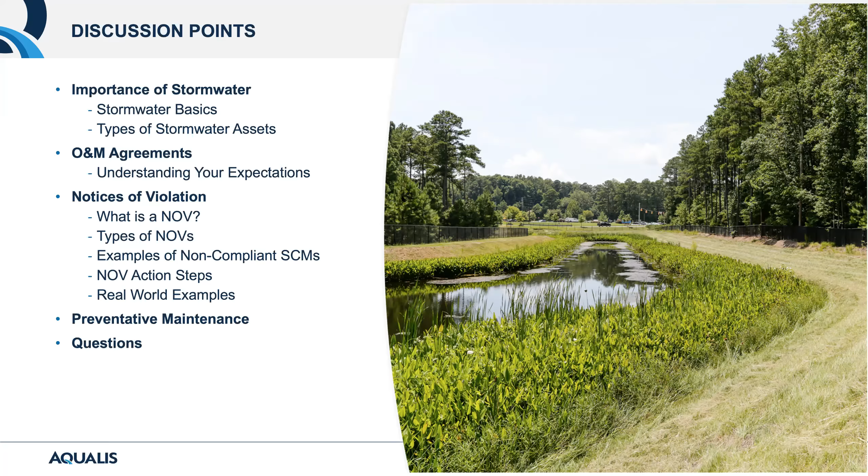Basic understandings and things. So without further ado, we'll get kicked off on some of the stormwater basics. Just a quirky drawing about the basics of stormwater, and we thought this was prevalent because obviously you've got runoff from buildings, you've got runoff from parking lots, and all of these things have potential harmful pollutants that can run into the storm system, whether it be gasoline, trash, or sediment. This is a constant battle with the stormwater system.

And I like this slide in particular because I think a lot of people, including myself before I got into the stormwater world, kind of forget about the stormwater once it hits that drain and starts going down to where we can't see it anymore. I think the public tends to forget about it unless things are flooded. And what I learned real quickly in the stormwater world is where that water eventually flows and how it gets there is just as important.

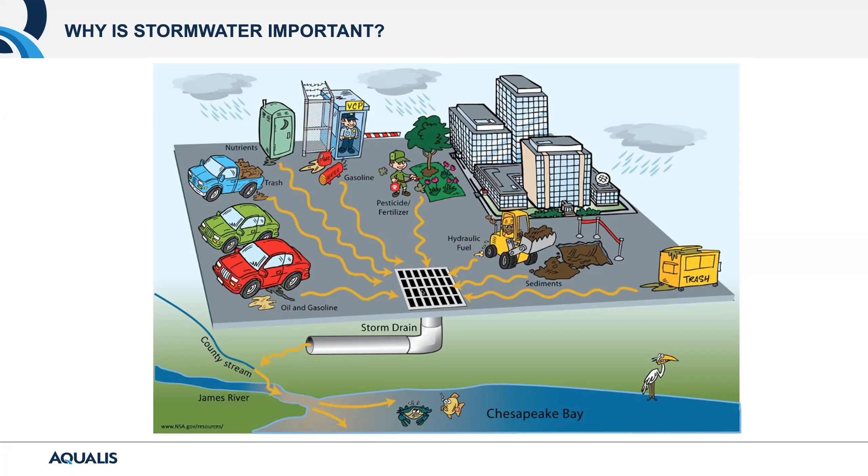As you can see in this slide, the storm drains discharge into the county stream, into a river, and into a major watershed at the Chesapeake Bay. And again, these are areas where people recreate, get food, swim, and fish. So it's very important that we make sure we do what we can as stewards of the land, stewards of our property, to make sure the water we're flushing down the system, for lack of a better term, is of high quality and managed the way it's supposed to be and how we've agreed to.

Continuing on, that diagram also was a good one, as well as this one, with stormwater runoff. In the early 70s, the United States basically realized that this runoff and all this development needed to be managed. So they came up with the Clean Water Act in 1972, and it was updated in the year 2000 with Phase 2 of the Clean Water Act. This basically states that any land disturbance or any development of one acre or more is required to comply with and manage their stormwater runoff.

There are some standard minimums to remain in compliance, but it's definitely something that the EPA and the United States government has put great importance on, and it's something we need to be aware of. This isn't something that's made up - this is something we're all relying on, and the government is pushing that compliance down to the local municipalities. So it's very important.

I want to point out, we're going to get into some acronyms and different terms. One on this page, MS4, basically stands for your municipal separate storm sewer system. So we've got the municipal and the four S's of separate storm sewer system. You might run across that in an NOV.

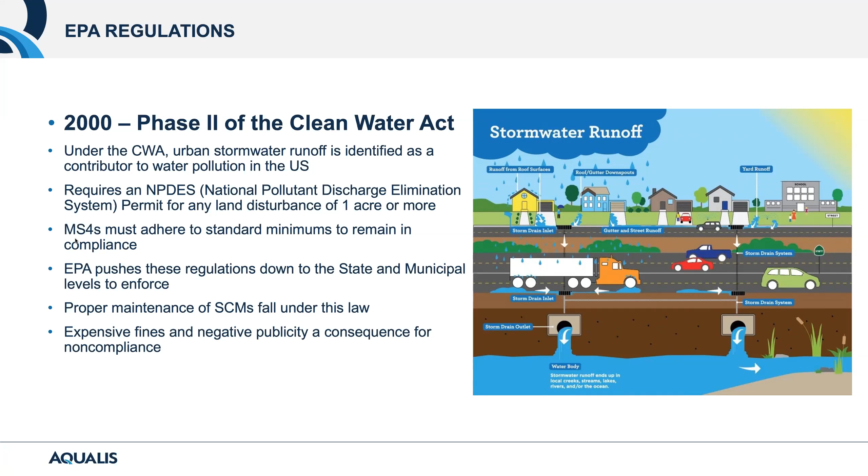It's basically the discharge area maintained by the municipality of where stormwater might run into. But again, it must be designed and adhere to minimum standards to be in compliance.

As we move forward, we're going to get into more acronyms. You will, if you ever receive an NOV, see acronyms like BMP or SCM. Really those acronyms are one and the same.

A BMP always kind of tripped me up. It's a best management practice, and it always tripped me up with the word 'practices' in there, describing some kind of action. But really that means it could be a thing - it could be a catch basin, it can be a pond. So I love the updated language of stormwater control measure.

It gives me a better feeling in my simple mind of what we're talking about and what that asset is to control the stormwater or convey it to wherever it needs to flow downstream. So you're going to see these acronyms a lot in pages and NOV letters. Just know that they're one and the same, and they're referring to the assets on your sites. We'll start to review some of these as we move forward - assets that either collect and convey and also ultimately discharge this rainwater.

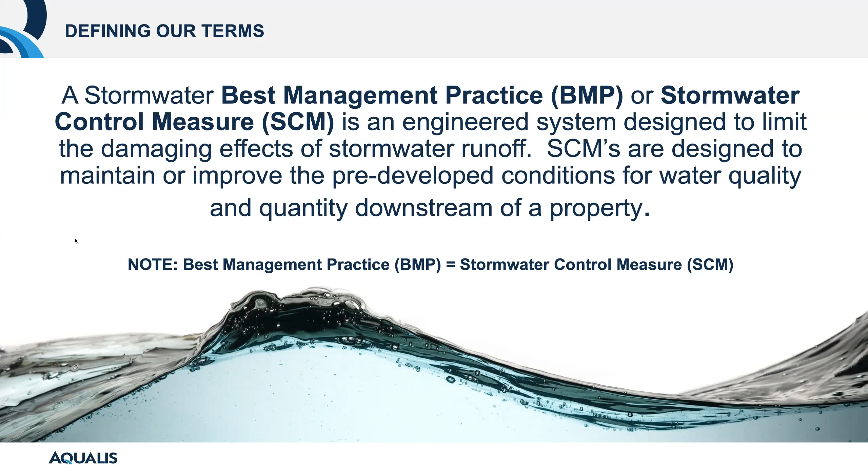There are definitely some SCMs that convey that stormwater to get there, but things like retention ponds - these are the actual ponds most commonly that are retaining water. You'll also hear the word detention pond. Detention ponds are basically the same kind of thing, but are really meant to detain the water for a certain amount of time before it either infiltrates into the ground or gets conveyed out to the MS4. So a good place to start with some of the language.

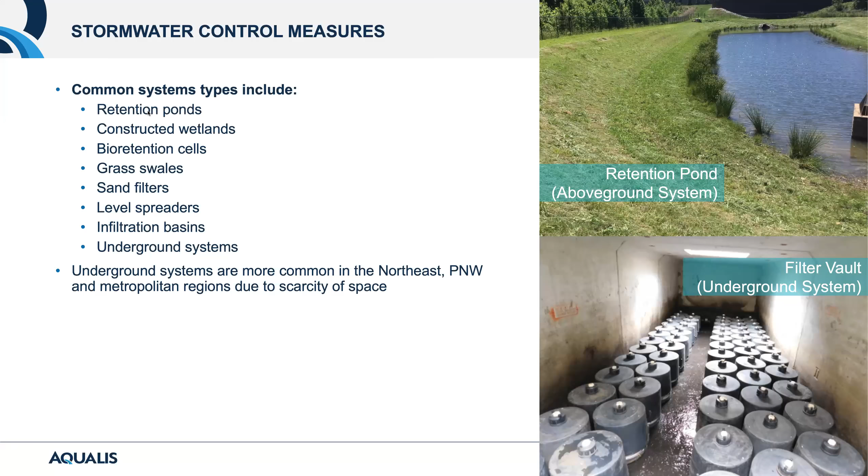Nowadays, with the importance of environmental push and stewardship of the land, you've got things like sand filters, which kind of naturally filter stormwater through a bed of sand. Grass swales convey, and bioretention cells are very popular up here in the northern Midwest, quite a few around the Minneapolis area. We'll get into a bit more of that, but know that these are all SCMs, and these are very common in use on the property or where that stormwater is going to end up.

Now, as we think about these in-use systems and these SCMs where the stormwater is going to eventually reside on your property, we think about two things: water quality and water quantity. Both of these can be an issue regarding stormwater and SCMs, and could trigger a notice of violation.

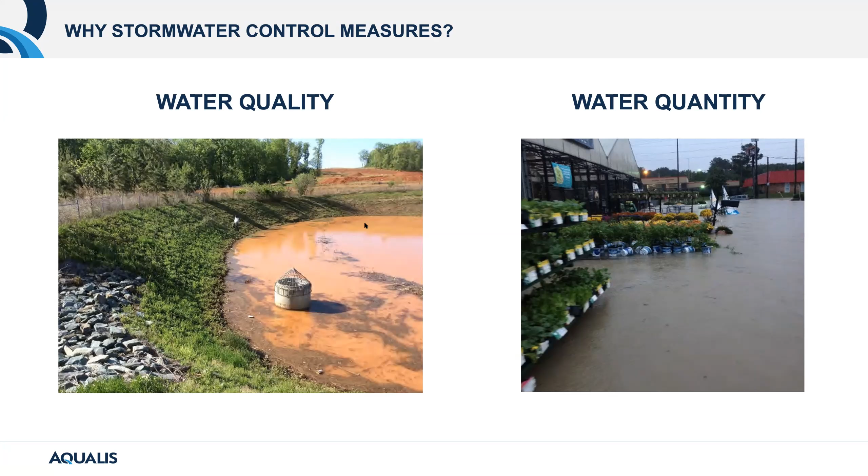And obviously you can see on the left, the water quality example - that water doesn't look very good there in that pond. We'll get into some of the pollutants and things that the Clean Water Act defines on the next page here. So we talk about pollutants and all the things that can affect water quality and a little bit of water quantity as well. But these are all things that are defined by the EPA and the Clean Water Act.

We're going to start with trash and debris.

Trash and debris negatively impacts living organisms and can clog up inlets and outlets. One of the most common places where trash and debris collects, at least in the retail world, is in your ponds, basins, and detention basins. Loading docks are also a very popular place where trash from everyday use collects. Stormwater typically ultimately runs there, so you need to stay on top of it to make sure drains and outlets are free and clear.

Another big thing the EPA points out is nutrients, anything in the water that can promote algae growth. Down in Florida's Everglades watershed, they had a strange red algae growth impacting the oceans, contributed in part by nutrients running off, including fertilizers. Up here in Minnesota, we get alerts during the summer when the water gets stagnant with algae growth on our lakes, even causing beaches to close. So it's important to know how that can affect the system.

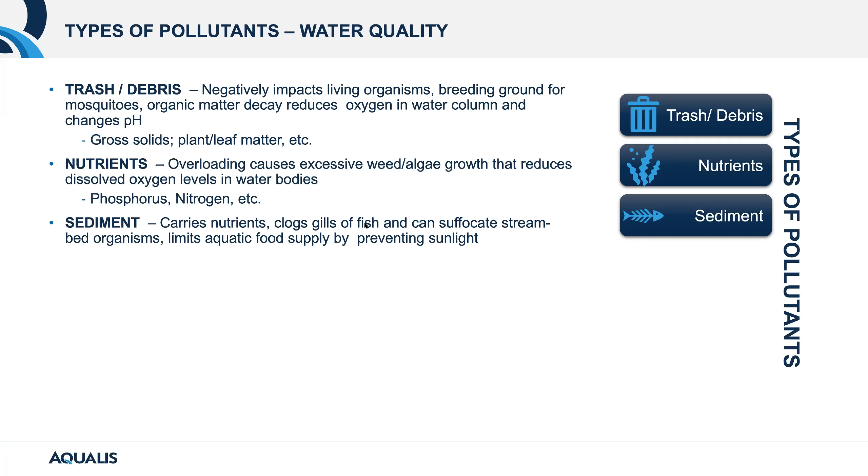We've also got sediment, which can be a lot of things flowing throughout the property via stormwater. Sediment is almost unavoidable—there's always dirt and rocks collected where stormwater runs to. It's very important because it can impact the places that convey stormwater, and if it collects too much where stormwater is meant to infiltrate the ground, it takes rehab and work to make sure the soil can accept and filter that stormwater naturally. It's a big one we run into often.

Heavy metals are another concern—parking lots, trucks, hydraulic systems, and trash compactors all have the potential to release heavy metals into the environment. It's pretty apparent how these wouldn't be good for living organisms, and nobody wants gas or diesel in their water.

Bacteria, animal waste, and sewage are not meant for the stormwater system. We're going to come to an example at the end of the presentation about animal waste and bacteria, and how serious that can be, including how a business had to deal with serious consequences from what they were releasing.

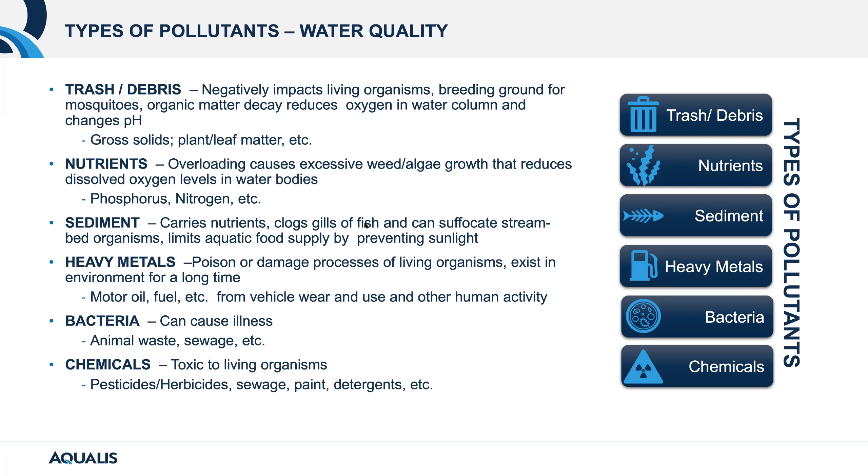Finally, we get into chemicals, which are very toxic to living organisms—things like pesticides and herbicides. We have to be careful, though that's not to say you can't use any pesticide or herbicide on a stormwater pond. In fact you can, and it's good practice if you've got invasive species like plants or certain algae. But we have to make sure those chemicals are safe for the stormwater system, and that's where a stormwater professional has the knowledge and experience to make sure you, as a property manager or owner, are following guidelines and putting the right things into your systems.

So we've talked about the types of pollutants. Now I want to get into the SCM, the stormwater control measure structures—these are very common ones you might have on your property.

Up in the upper left here is an idea of a detention pond—a low-lying area, basically a pond without water, often vegetated like you see there. This one has a concrete flume in the bottom. Stormwater enters the system on the inlet side, past where the crew member is working, and flows down this flume without eroding the pond itself, infiltrating and collecting in the detention pond. Detention ponds are mostly meant to collect rainwater and let it infiltrate into the ground.

Our experience, and this can be noted in an NOV as well, is that water should infiltrate within a certain period of time—often 72 hours after a certain quantity of rain—and inspectors and O&M agreements will point that out. So if you have a detention pond and after a rain event the water lasts a week or two, there might be an issue. Over here on the right, we have a grass swale, usually a natural conveyance system that receives rainwater and moves it via gravity to a retention or detention pond.

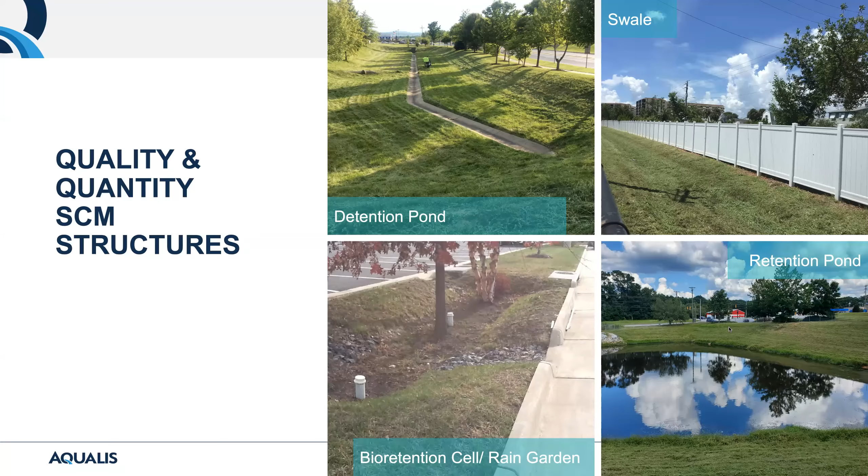Lastly, down here in the bottom right, we've got an example of a retention pond, again probably very common on a lot of your properties, meant to retain water and hold it. When that water reaches a certain level, it's typically discharged through an outlet of some kind into the MS4 or along down the line. Here's an example of some of the conveyance structures that would lead stormwater to some of the ponds and bioretention cells.

Again, all of these are very critical to the stormwater system, but also very critical to watch out for possible failures. Concrete flumes can crack, and if the water's not running down the flume, it's cutting into the soil, causing erosion and sediment that's ultimately flowing out.

Catch basins and curb inlets, very common, especially in areas where it freezes and thaws, to have sinkholes around them. The water draining into these structures during heavy rain events almost creates a vacuum. So if anything on the inside of these structures is compromised, the water almost acts like a vacuum, sucking out the undersoil under some of this pavement and causing these areas to sink.

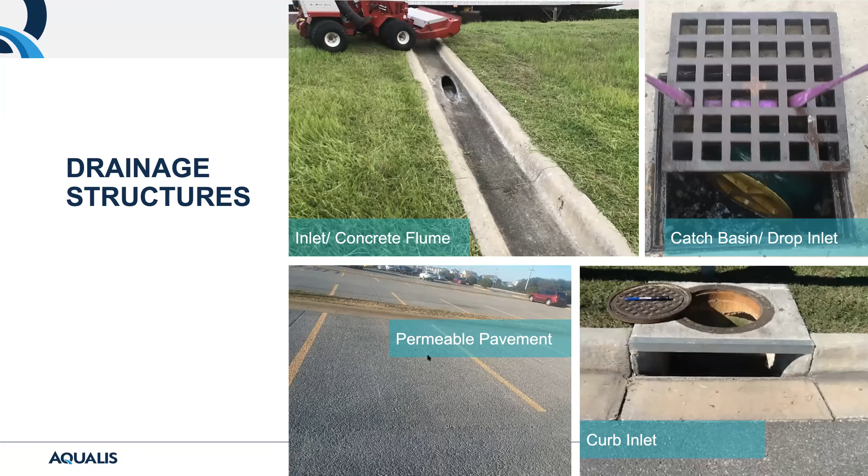Even the permeable pavement, sediment is going to want to collect in these. It's unavoidable. So there are some very specific maintenance items to make sure that pavement remains able to absorb that rainwater and collect it and do what it's designed to do.

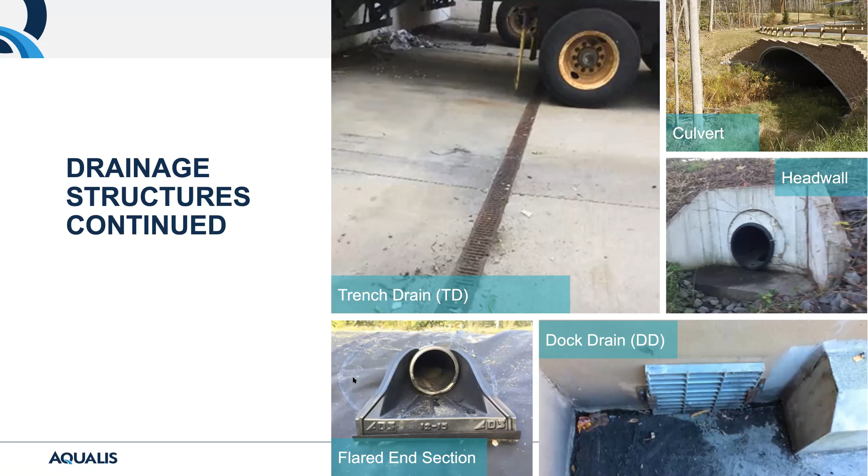Other items like head walls and flared end sections are basically designed in such a manner to limit the amount of possible issues around them. You can see where this water eventually flows out, especially in this flared end section, as this one's actually being constructed. You just want to minimize that erosion and possible issues that can flare up with these.

So now that we have a basic understanding of some of the items that might be on our properties, we want to get into the O&M agreements.

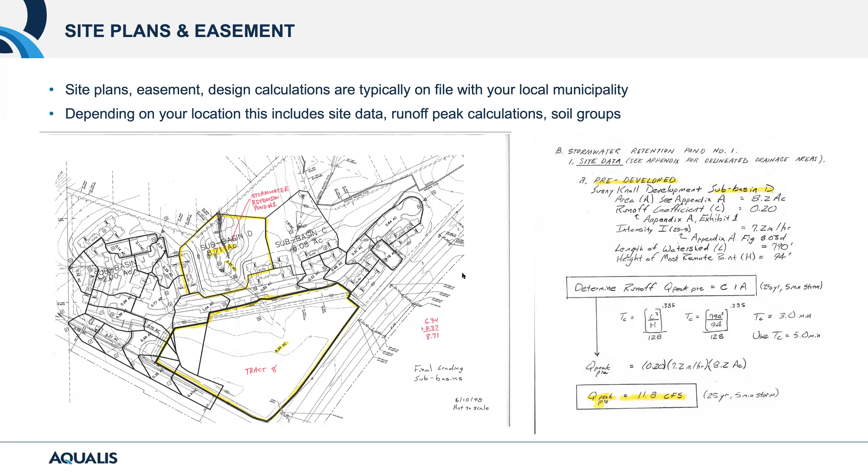When I talk to customers, we don't think a whole lot about our stormwater systems until the parking lot's flooded or the store is starting to flood. But we want to ensure those items are in good shape and can handle these occurrences when a big storm comes. As we speak, there's another hurricane developing in the Gulf heading towards Louisiana, Alabama, Mississippi, and Florida dealt with one earlier. It's imperative that we stay on top of and understand our systems, keep them in good shape, because these occurrences seem to be happening more and more.

So when we talk about O&M plans, based on those approved site plans we just saw, the municipality will come up with an agreement with the property developer, the eventual property owner, on how that system should be maintained and/or what needs to be reported to the city or municipality to make sure you're taking care of it.

I look at these bullet points as the who, what, and where - who is responsible, what are we responsible for, and where are these assets. Sometimes we've run into customers who are actually responsible for ponds across streets and a quarter mile from their actual building, but it's part of the easement - part of the O&M agreement they agreed to upon developing the property. So it's very important we understand these.

These are typically on file with the municipality, and in the internet age we all live in now, it usually takes maybe a phone call or a little internet time, but we can find it. The first step is knowing what we're responsible for and knowing what the expectations are.

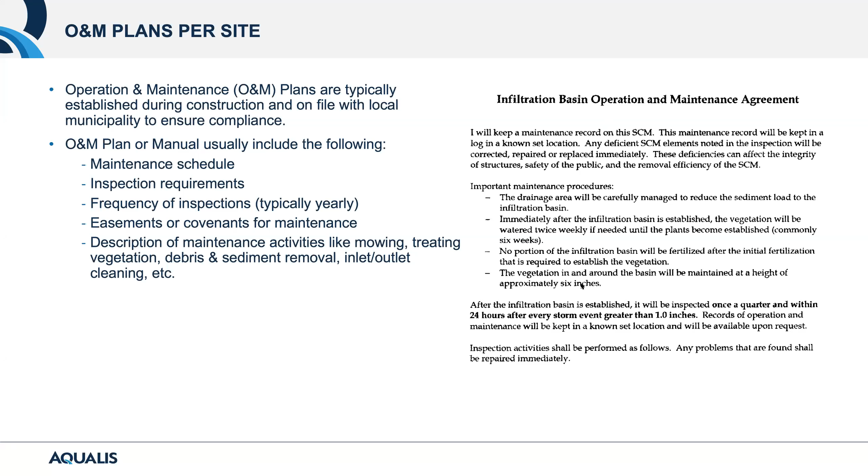On the right here we've got an example - an actual example from a customer of ours on an O&M agreement. As you read through this, and especially when you get the slides after the presentation, you can read through this in more detail, but it's very, very detailed. We like this as stormwater providers - a company like Aqualis - the more detail and the more we know about what's expected, the better, and the more we can make sure those items are taken care of and the customer and everybody's in compliance.

As we go through this, you can see they talk about the acronym SCM, the perimeter of the basin, the inlet devices - very specific examples. A lot of this work is handled by both stormwater providers and landscapers. A cutoff we typically use is basically the top of the berm of the pond - retention ponds typically have fences around them, so anything inside the fence, or if it's a detention basin without a fence, the top of that berm, is where stormwater starts and landscaping ends, and vice versa coming out.

We'll get into some later examples about the advantage it is to have a qualified stormwater provider like Aqualis on site helping you out.

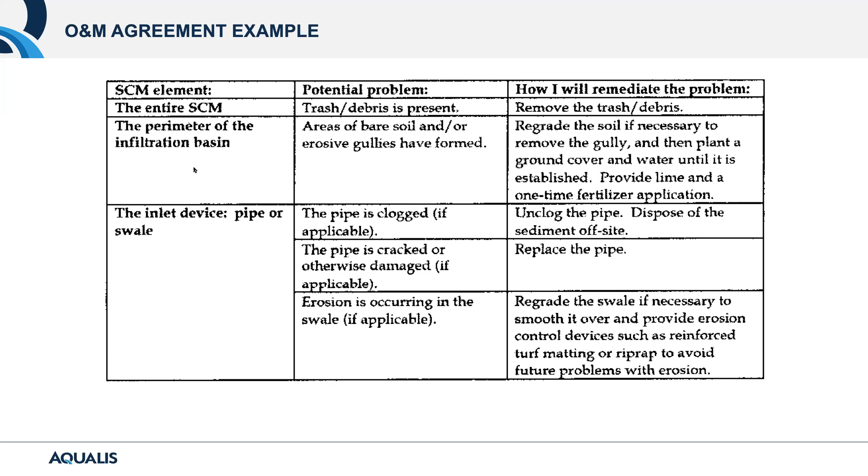A lot of it looks like landscaping, but a lot of the times our guys are weeding through the vegetation and the trash in order to look for some of the important things like inlets and outlets and erosion and things like that.

So a great example through these next couple of slides about exact responsibilities for this particular property owner, outlets, embankments, receiving water, what it should look like. Very great example. And I will say that this example is probably on the extreme, I don't want to necessarily say high quality, but the extreme detail end of things.

I would say a majority, or at least half of our O&M agreements that we come across on properties basically will outline, hey, we want you to inspect the property every so often, quarterly, once a year, repair any deficiencies, and basically send us a report that you've done the work. Very simple most of the time. But we wanted to show you an example from one end of the extreme to the other.

So here we go. Notices of violation. Again, the purpose of this is how to act, respond, and prevent these notices of violation moving forward. We've taken the steps. We know what's on our site.

We know what an SCM is now. We know what our expectations are because we've reviewed our operations and maintenance manuals and expectations. And what if we're thrust into a position where we have to handle one, or sometimes things slip through the crack and we get a notice of violation? So we'll start to get into how to handle some of that.

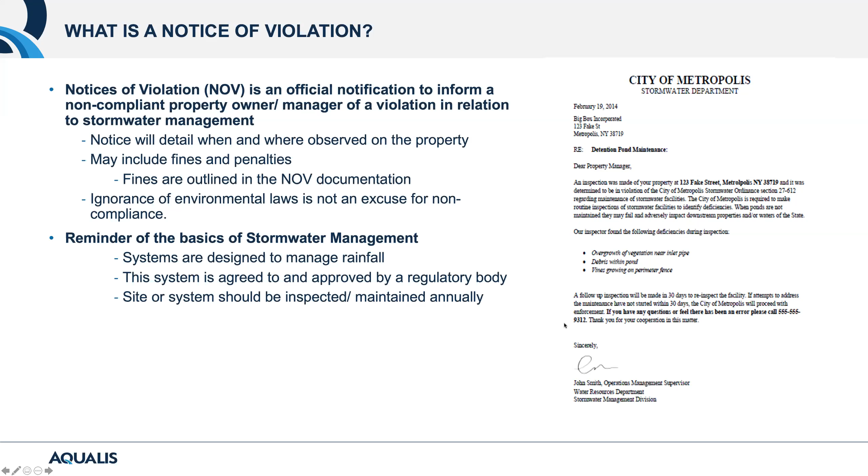So as we move forward, there's two different types of NOVs typically on the stormwater side of things. One is during construction. During construction, as you may have noticed, you might see particular items like silt fences around a property as it's being developed, straw wattles, large rocks where the equipment's coming in and out of the road to prevent track out. You definitely need to have a plan on file with your construction permits, need to include a stormwater pollution prevention plan.

But most of our audience today, as property managements, property owners, are dealing with the NOVs that would happen after construction. We're given a property, we're thrust into a role that now we need to manage some of these things. So the types of NOVs that we would most likely see are after construction.

I would say the most common in this list is a failure to maintain or repair your SCMs, and literally a failure to conduct and document inspections. Super simple items, usually depending on the type of system you have, very cost effective to get the maintenance or an inspection done, really low cost. Again, it's just a failure of doing some of those that are the very most common that we run into and help customers with.

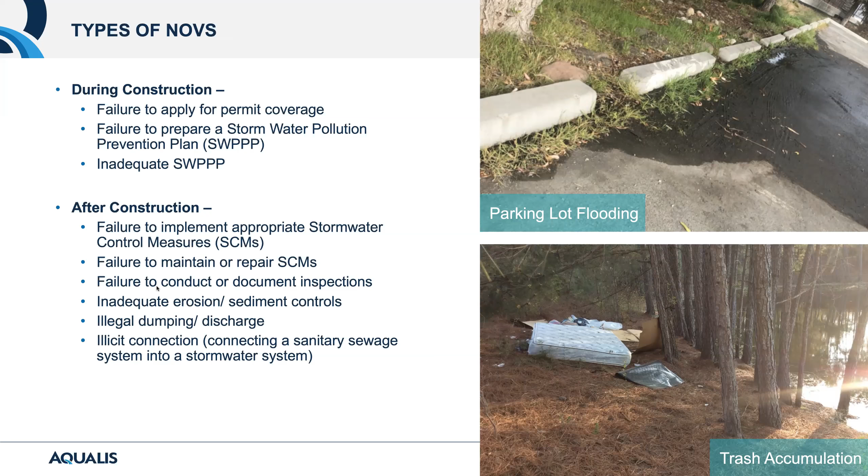We wanted to include some examples of what an inspector might see along a property, or something you might notice even before an inspector picks up on what's required, and typically always out of compliance regarding your O&M agreement. Some very common ones we run across throughout the country.

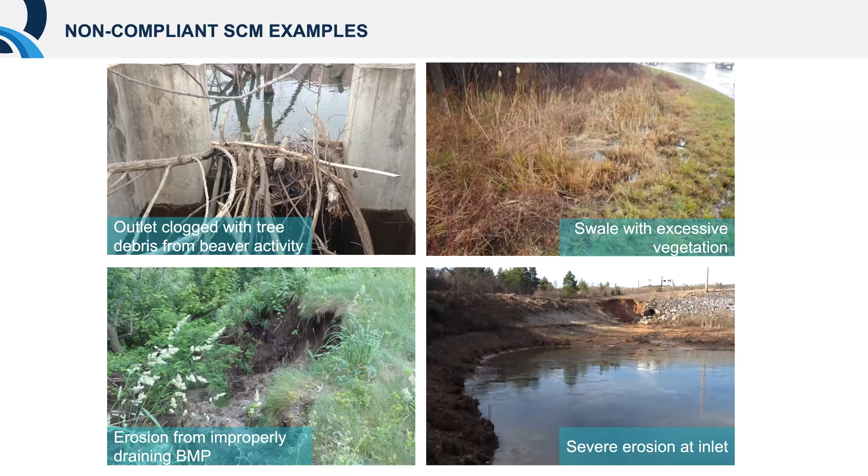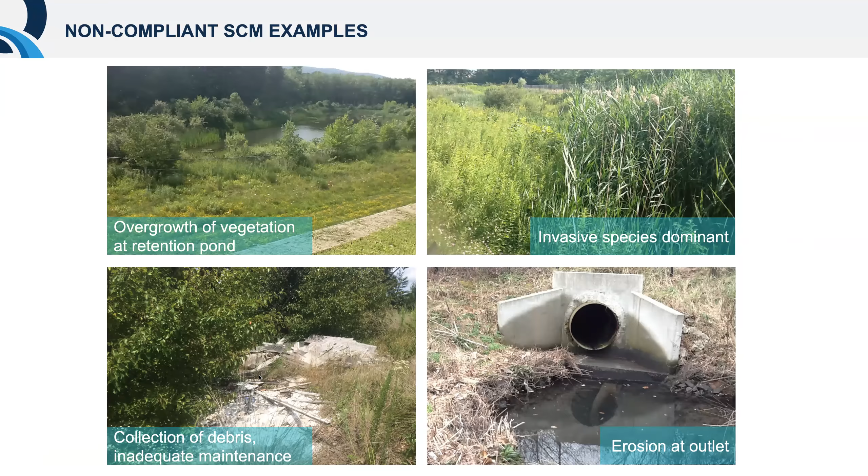Here we've got a flared end section where some undercutting is going on with the water flowing out. We've got trash and debris too - in a lot of areas of the country, I know our customers have to deal with people coming by and dumping stuff into the low areas of their ponds.

Continuing on, those are some examples of what you might see, what an inspector might see. This slide is really meant to explain that the EPA pushes enforcement to the local jurisdiction most times, and an NOV can be issued just after a general inspection, or maybe a complaint by the general public - if you've got a pond that's overgrown or some apparent issue the public might see, it might trigger an inspection.

But really, inspectors are normally great people - they're not out to 'get' anybody or any business. Basically, their role is that the public has entrusted them to make sure businesses in their jurisdiction are complying with stormwater requirements, and we're all, as people living in towns and municipalities, end users of where the stormwater runs, either directly or indirectly. So inspectors are just out to do their jobs, making sure businesses and property owners comply with what's agreed upon.

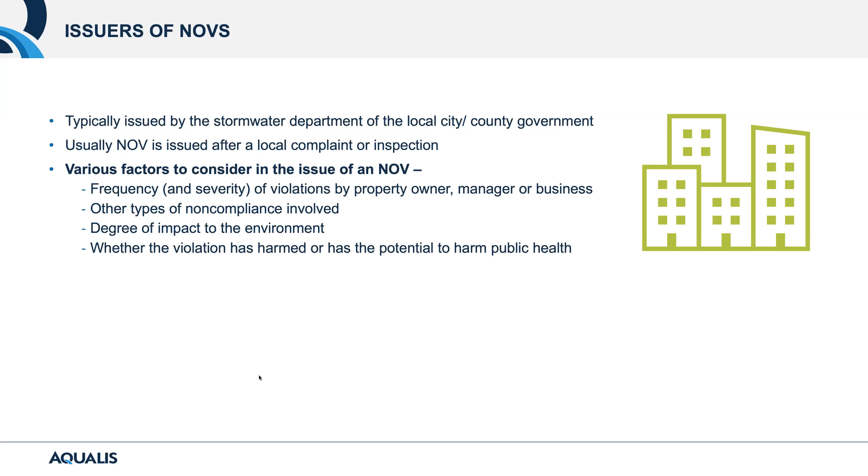Typically, as long as you're communicating and they understand that you've received the letter and are putting an action plan in place, they're very reasonable and will typically agree to the timing, even if you're over the actual timing on the letter. Again, great people, not meant to pick on anybody in particular, just doing their job.

I wanted to get into the next few slides about some real world examples that we've helped customers out on. These excerpts are actual excerpts from the NOVs that were issued. These examples show the potential cost in some of these, and how enlisting a stormwater professional can help, and how having that plan and understanding of your systems can literally save you dollars down the road. In this example, we had a hospitality location.

They were failing, again a very common one, to submit their maintenance logs and inspection requirements for the last few years. They had an inspection in 2019 that had some failures. I think the client took it upon themselves and said, hey, we'll get this taken care of, but failed to do that, failed to enlist the proper help. Once the inspection was done again, the inspector in the NOV letter basically says, none of the things you told me were going to get done are done. Here's a list of all that needs to be done, and here are the potential fine opportunities: a $300 fine, court costs, hearing costs, and up to $1,000 a day.

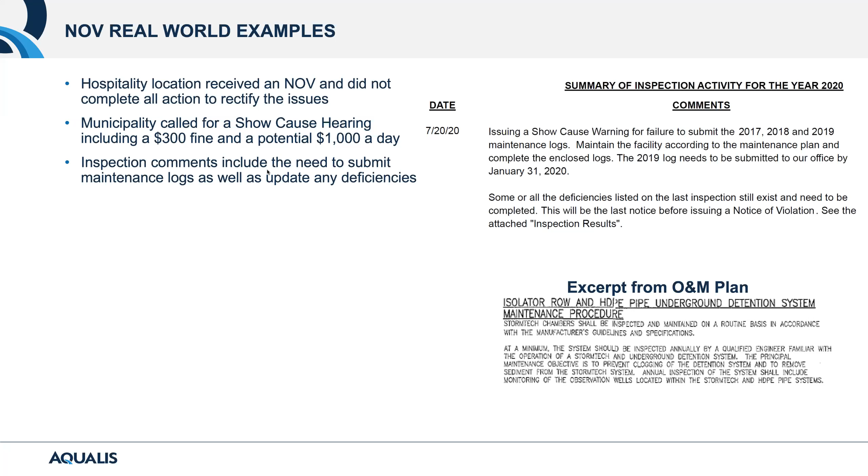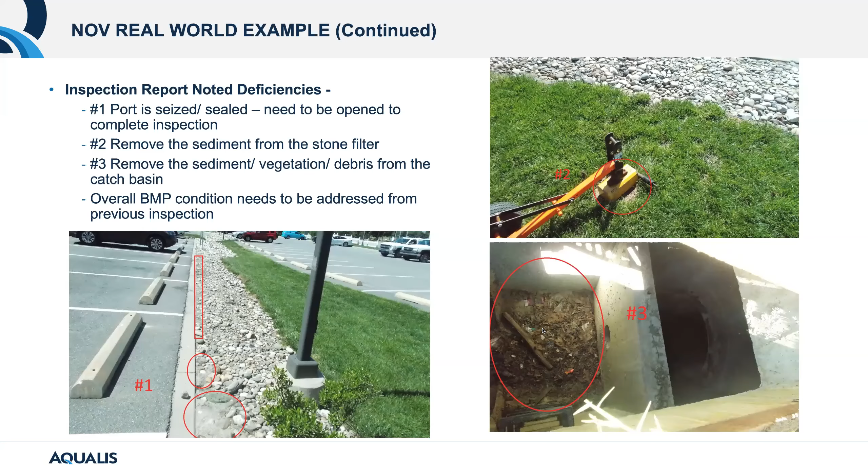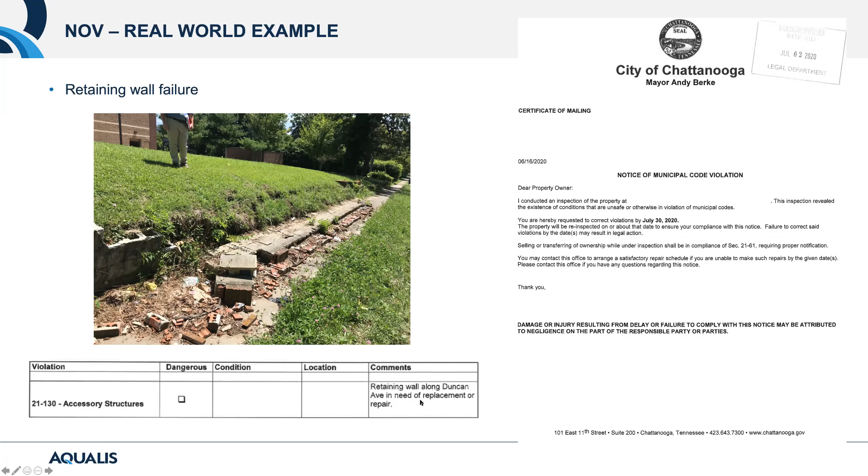Here's a quick issue, not necessarily stormwater related, but a customer of ours reached out with a notice of violation for retaining wall failure. A great example of communication: this retaining wall was long and old with trees, and a real expensive fix if you were going to replace the entire thing. But a simple call to the inspector basically said, hey, all I really want is this stuff off that sidewalk. So we were able to clean that up, and the customer got a solution for a lot less than what the language actually said, which was replacement or repair. Again, communication is key, and we'll come back to that.

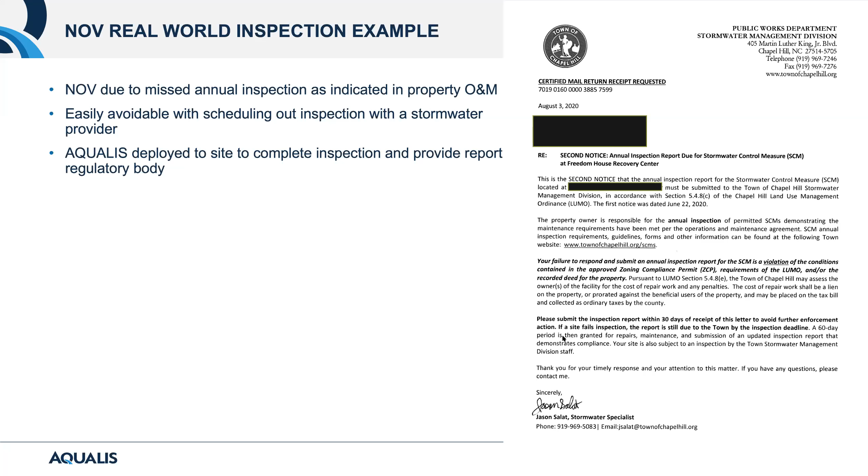Here's a simple example of an NOV given for someone not completing their inspections. It's a second notice, and again it goes through all the things you'll be able to see once we review the slides, pointing out exactly when the timeline starts and what's due. But again, something as simple as an inspection of your stormwater system is just a few hundred dollars that could have been avoided—just one less thing to deal with as a property manager or owner.

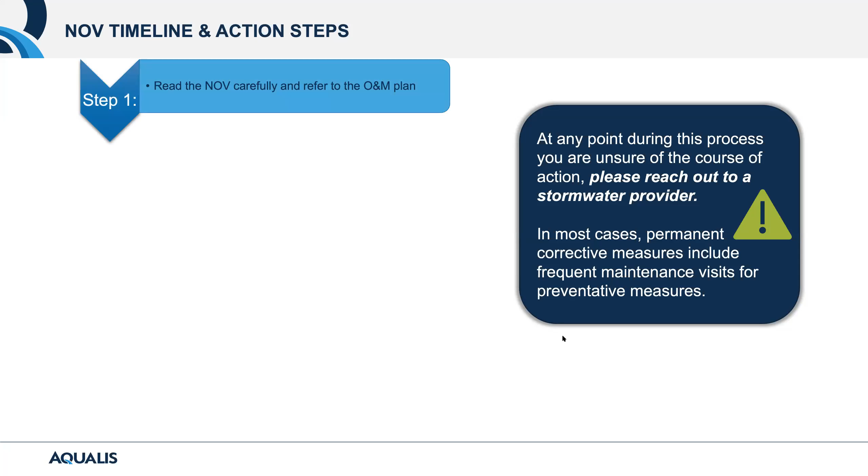Going through those, really the nuts and bolts of this, what you can take away is the NOV timeline and action steps. If anything, we want to review these in a step-by-step manner. Step one, read the NOV carefully, refer to your O&M plan, know it.

Step two has basically three parts. You want to respond and let the inspector and regulatory body know you've received it. You need to consult stormwater professionals if you don't have the ability yourself to take care of the issue. And number three is to develop that action plan. Once you have an action plan or consulted with a stormwater professional, it's always best to run that action plan by the regulatory body and see if they agree.

Communication being key there. Step four, we're going to complete that action plan. Step five, ultimately we're going to follow up with the regulatory body with a report and or a phone call, always following up with some kind of email. If it's a phone call, make sure it's in writing that we've repaired, we've taken care of your issues, and you're good with it. Make sure you get that reply from the inspector saying yes, we're good, moving forward we know what's going on, and won't get those again.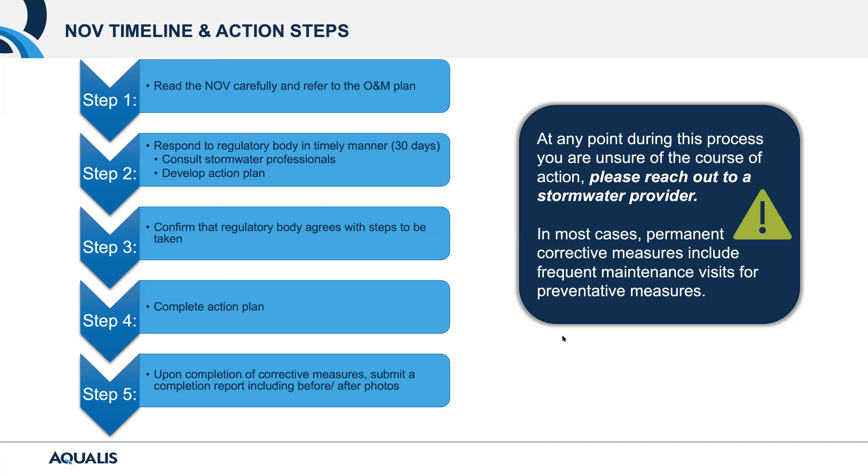So pretty simple steps. Again, one of the main items to take away is communication. You can never communicate too much. Pretty simple, but follow those steps and you should be in good standing with dealing with an NOV.

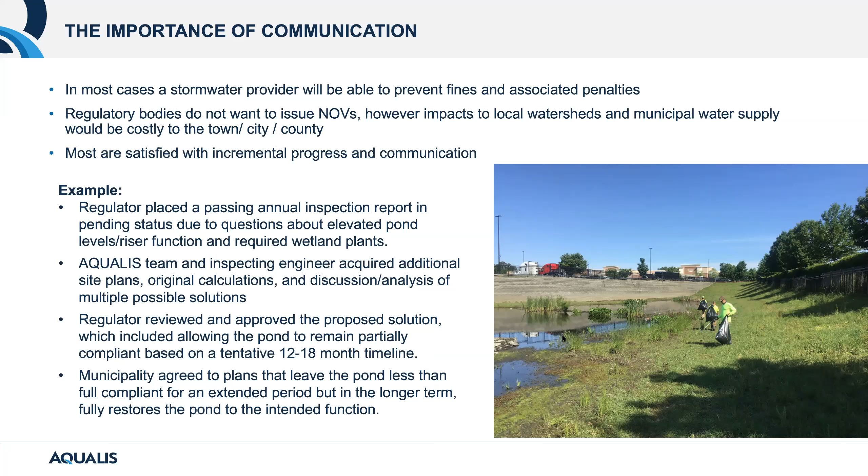As we get into these last few slides, I know we're going to get pressed on time, so I'll go quickly. Here's a communication example where an NOV came in. This particular customer has a designed wetland that they need to maintain and make sure it's up to snuff. It wasn't, but some communication was able to relieve the inspector, let them know they're taking care of it, and they actually got about a year and a half to take care of this problem due to certain vegetation that needs to grow within this designed wetland.

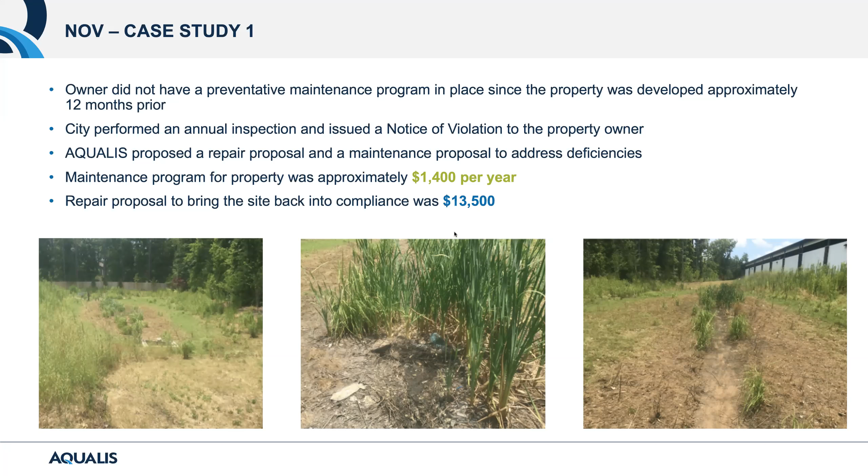Here's an easy example: a property owner had a brand new property and did not put any type of maintenance plan or inspection plan in place upon development of the property. It would have been very cost effective to do so, at roughly $1,400 per year. After 12 months of doing nothing, an inspector came by and noted deficiencies like erosion, invasive species, and overgrowth. The cost to get this property back in compliance was about $13,500 - all of which would have been taken care of during routine maintenance visits at about $1,400 per year. So you can see how cost effective some of this is.

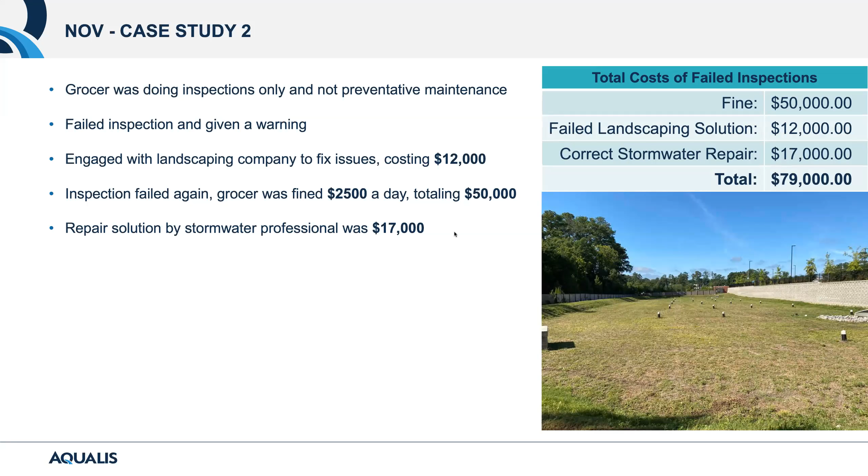This next example is one of the most extreme we've run across. We had a customer, a grocer, who was only doing inspections and no preventative maintenance, and failed an inspection. They engaged with a landscaping company to fix the issues, going with the cheaper option. Because of their lack of knowledge and not being qualified in stormwater services and what's expected, their fix failed, and the property failed an inspection again - resulting in a fine of $2,500 a day. We were able to come in and provide a repair solution ultimately for $17,000. So you can see this is real world dollars this grocer had to pay on one site, and who knows how that affected that business at year end. Basically, a large majority of this could have been avoidable. I know the maintenance program was probably more intense for this particular site, but again, a lot more cost effective than going through the repairs and fines.

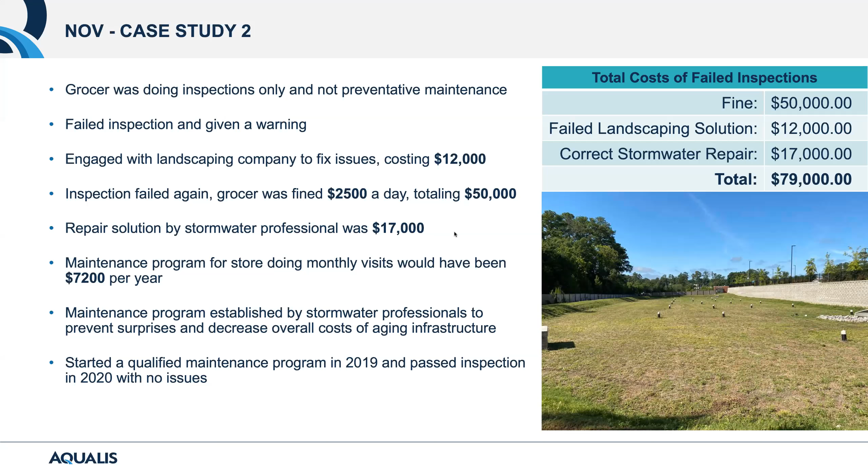Again, they engaged us, got onto a stormwater maintenance program, and passed their 2020 inspection with flying colors.

Communication, can't stress that enough. Communication with your stormwater provider, communication with the regulatory body. That maintenance program is going to help avoid costly fines and make sure you get that scheduled inspection and it's delivered to the regulatory body. And ultimately, you can be proud that your business or your property is making an impact as a private citizen that each of us are. You're ultimately doing good for your direct and indirect use of the water, the runoff.

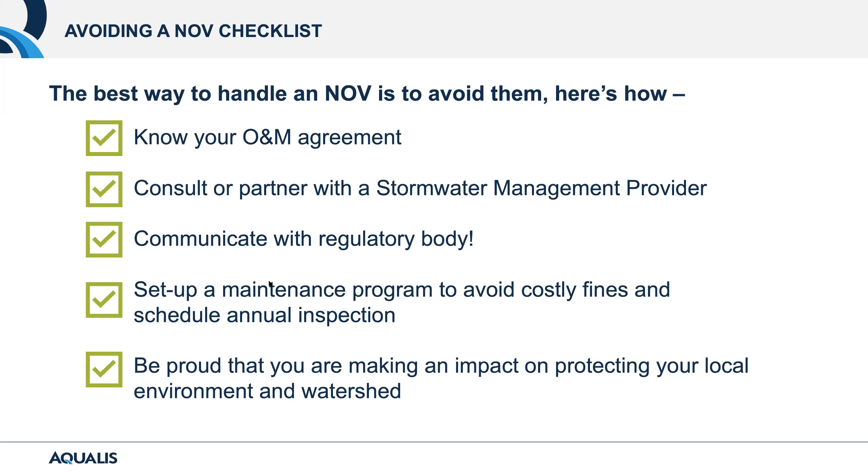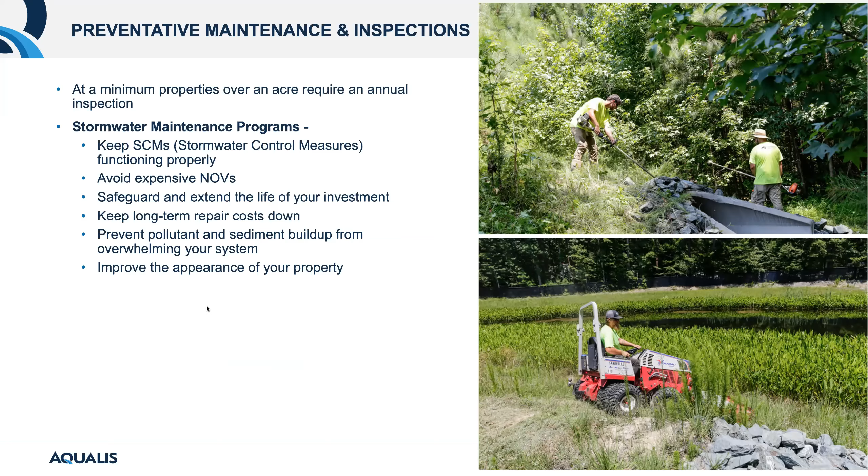Then finally, we'll go through questions. I think there's a handful of questions, and I'm going to turn it over to Amy here. But again, we appreciate you joining today.